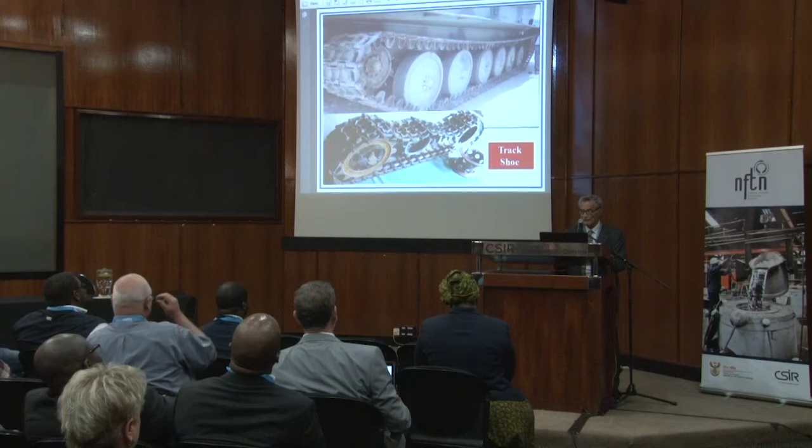Now I give some examples very quickly of spare parts produced in our foundry. The first one: we are the only producers of these track shoes for the tanks of our military forces. This is made from high manganese steel, and this has already been going on for 25 years. The same product can be used for agricultural equipment, for tractors.

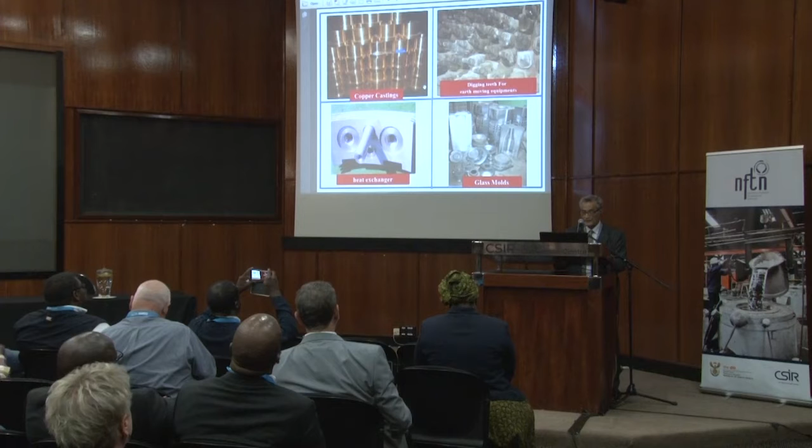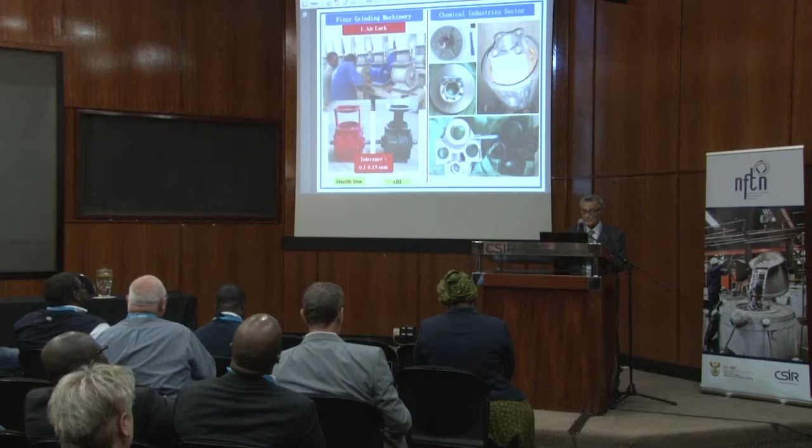We are producing copper castings, digging teeth for our Suez Canal development, heat exchangers, glass molds from a special type of cast iron, different spare parts for the airlock of grain milling machines, which are now used instead of imported ones, and different spare parts for our chemical industry sector, the railway sector, and the metallurgical sector.

In 1949, with the first development of ductile iron, or spheroidal graphite iron, with very small additions of magnesium up to 0.04 or 0.05 percent, the graphite flakes were transformed into spheroidal graphite. This neutralized the detrimental effect of the graphite flakes. We developed this technology because addition of magnesium is not very easy; it is a very pyrophoric process and sometimes gives explosions and dangerous effects.

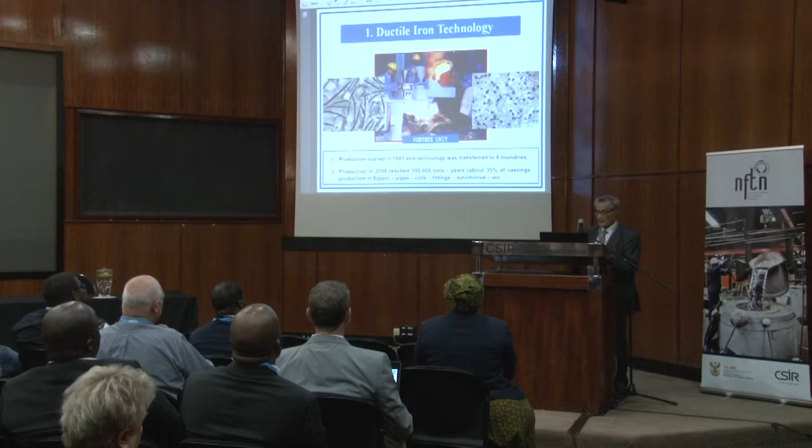We developed a very safe technology, which we call the vortex process, where we pour the molten metal into this tundish, and the metal goes into this compartment tangentially. It rotates in a vortex, and then we add the magnesium alloy through this hopper in the middle of the vortex. The reaction is then very mild, as you can see people standing beside it with no danger at all.

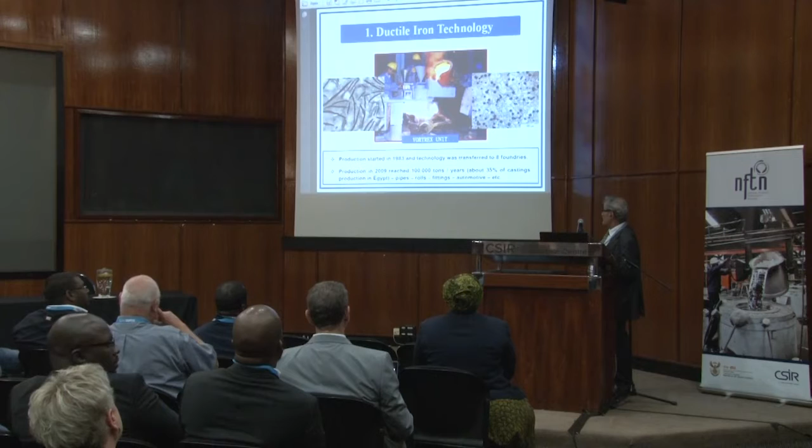We have introduced this technology into 8 Egyptian foundries, and in 2009 we were producing 100,000 tons per year of ductile iron using this technology, representing about 35% of the casting production in Egypt, used for pipes, rolls, fittings, automotive parts, and so on.

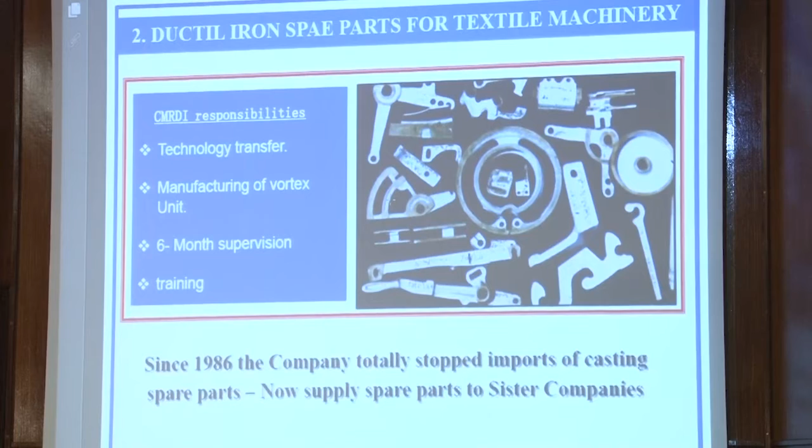Then we moved to the textile spare parts. At the time, we had one of our textile integrated companies employing about 35,000 laborers. It was one of the largest in the world, and they had some problems with spare parts. Spare parts of the textile machinery are rather thin, 2-3 millimeters, so it is not very easy to cast.

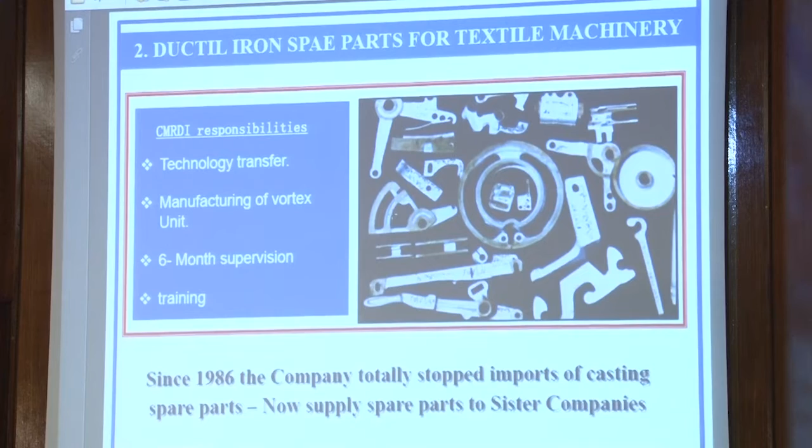The decision was taken to replace the malleable iron castings with ductile iron castings in 1986. Our institute was in charge of technology transfer, manufacturing of the vortex unit in our institute, 6 months of supervision of production, and then training. Since 1986-87, this company has totally stopped importing casting spare parts. Now they are even producing spare parts for other textile sister companies.

Now we move to one of the biggest challenges: ductile iron rolls. Without having local technology for ductile iron roll manufacturing, any country is in danger, really. This happened in some African countries, like I remember Nigeria and Algeria, where the steel industry stopped completely because of the lack of local technology and lack of hard currency required to import these very economically and strategically important castings.

In Egypt now we are reaching 10 to 12 million tons per year, and they need about 7,000 tons of rolls per year. It is a very important product strategically and economically. Thousands of rolls were produced. We have produced about 5,000 rolls until now in different foundries, both single and double poured, as I am going to explain. Several research projects were planned in our institute to increase the competitiveness of these products in both the Egyptian market and the international market, aiming at improving performance or lowering production cost, thus increasing competitiveness.

Now let me quickly show you how we cast. This should have been shown by animation, but I'll explain it. We cast the roll vertically. You need the surface barrel to have high abrasion resistance, meaning high hardness, and then you need high fracture toughness with lower hardness elsewhere. That's why we cast the roll barrel in cast iron chill.

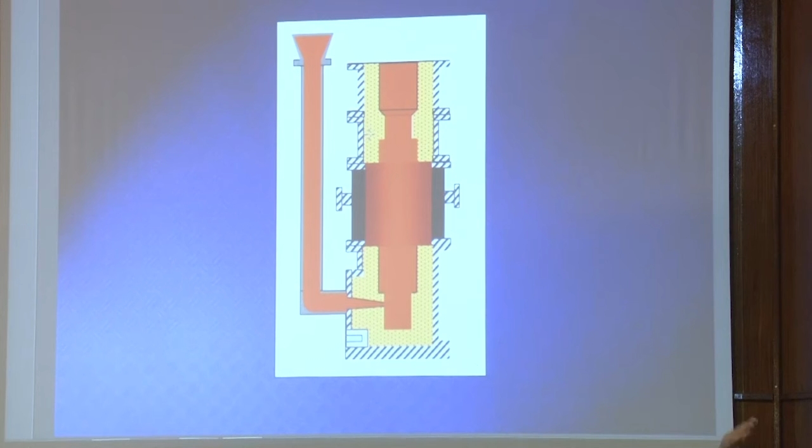This is the black one, a big cast iron mold die, or chill, whose main function is to increase the cooling rate of the iron and promote the formation of carbides at the surface of the barrel. Meanwhile, the two necks, lower and upper, are cast in green sand molds. Lower solidification rate gives lower amounts of carbides and higher fracture toughness.

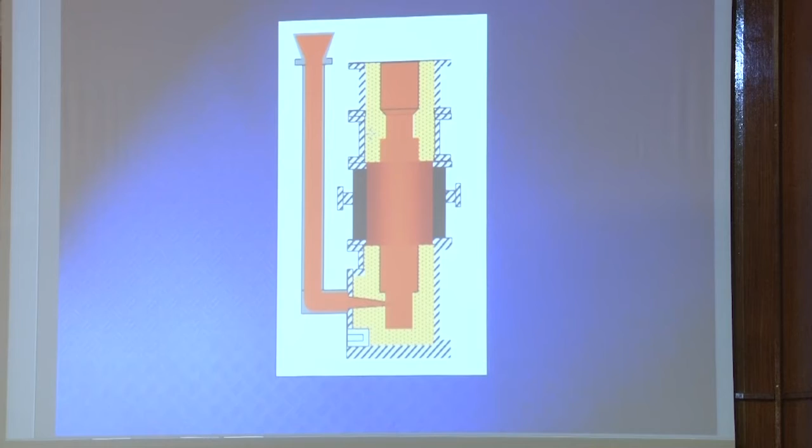We pour the metal from the top and it fills the mold. This is possible, but if you need high hardness at the roll surface, you have to increase the carbon content to form carbides, and add some chromium and nickel - chromium to form chromium carbides with the carbon, and nickel to enhance the formation of martensite at the surface for higher hardness. If you increase carbon, chromium, and nickel, the barrel will be fine, but you will also increase the hardness of the necks.

And then there's a danger that the necks will be broken during operation, which may lead to catastrophic accidents. So we started working with not a single pour, where we pour only one metal into the mold. In the double pour, we use a different technology. We have the same setup, but we overflow before the top, in the middle of the top neck.

We first cast a very hard material, high in chromium, nickel, and manganese, filling the mold. We leave it for 3.5 to 4 minutes, enough to form a solidified shell, while the rest of the metal is still liquid. After this, we pour another tough material into the same system. This should have been shown by animation, but I'm sorry for that.

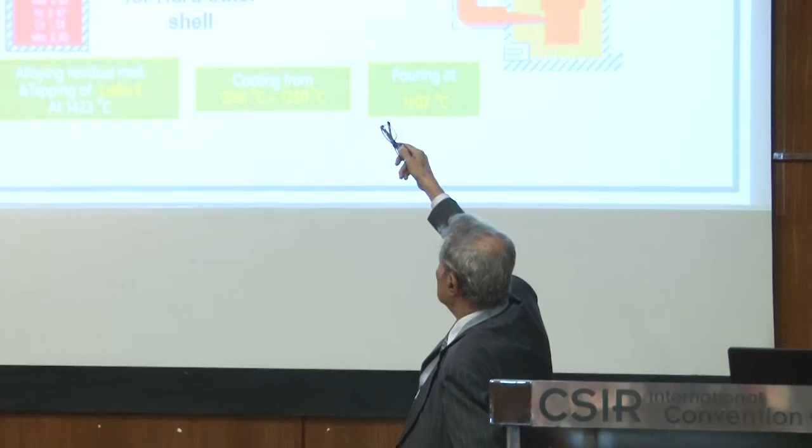chromium 0.3%, for example, nickel 1.4%, and so on. This is the low alloyed iron, which is supposed to form the core of the roll. And we kept it away for a while.

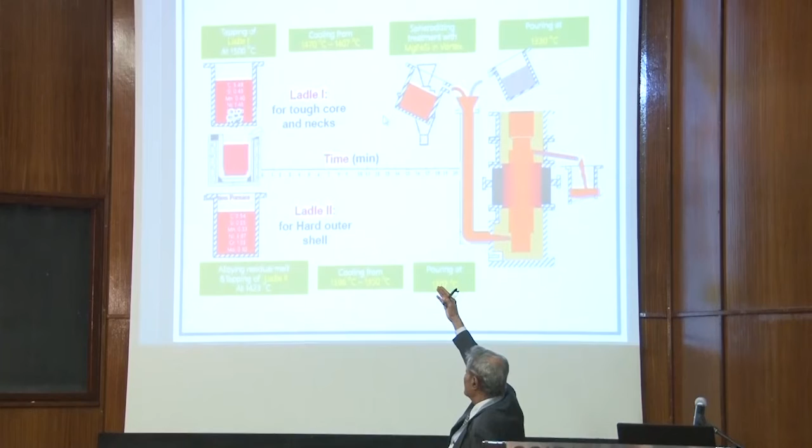Then we added the rest of the alloying elements in the furnace, with chromium up to 1.3% and nickel up to about 4%. This is the high alloy, supposed to represent the outer shell of the roll.

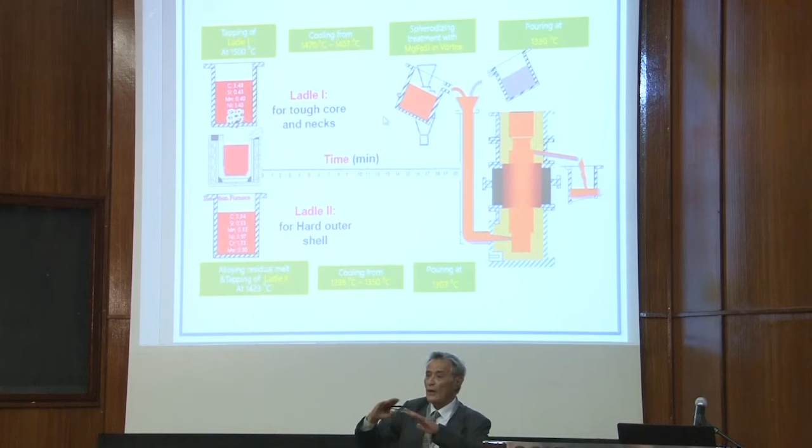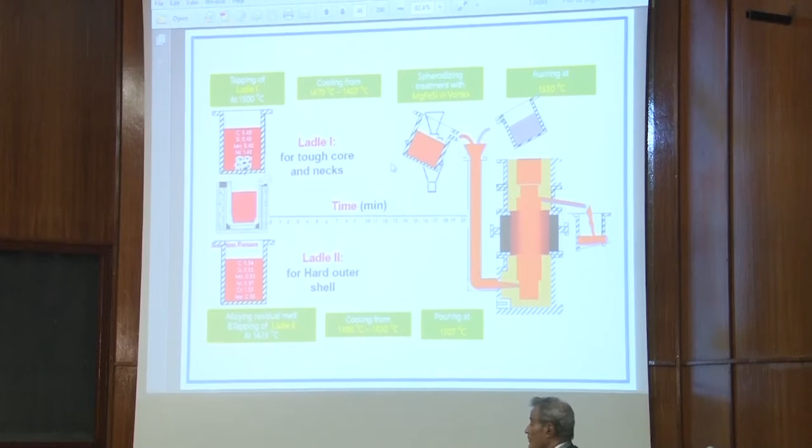Then we took the hard metal, cooled it to 1307, and poured it into the mold, leaving it for 3-4 minutes to form the outer shell, the fired shell.

At the same time, we took the low alloyed iron, treated it with the vortex process to form spheroidal graphite ductile iron, and poured it to form the second layer, or the core, of the roll.

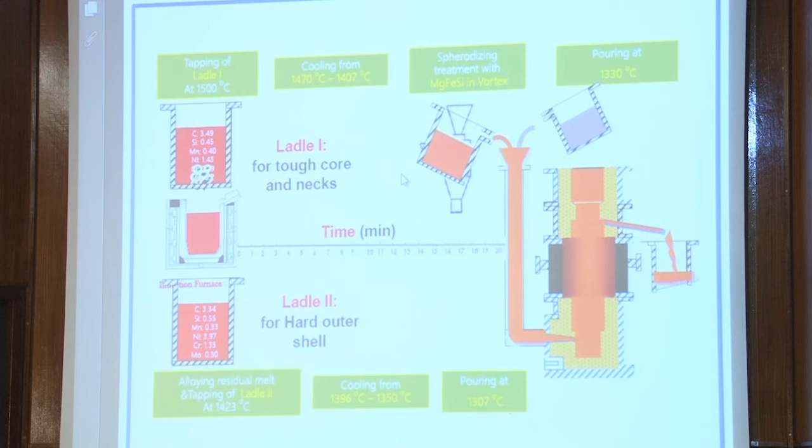It should have been explained by animation, but unfortunately it doesn't work here. Of course, if you have any questions or any interest in this technology, we can discuss it after the lecture.

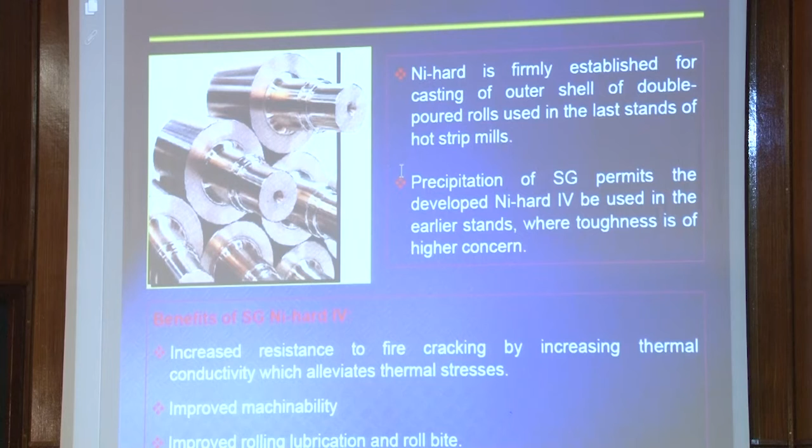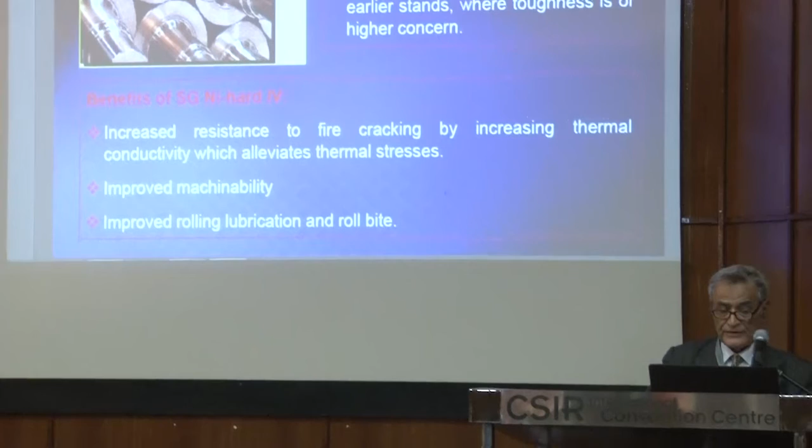Now the alloy, the hard nickel alloy, we call it Ni-hard, is firmly established for casting the outer shell of double poured rolls used in the last stands of hot strip mills. The precipitation of spheroidal graphite permits the developed Ni-hard IV to be used in the early stands where toughness is of higher concern, and the benefits of spheroidal graphite are increased resistance to fire cracking, improved machinability, improved rolling lubrication, and roll bite.

We have so many different types of rolls, about 50 or 60 different rolls, but mainly they can be categorized into two groups: definite chill, or clear chill, rolls and indefinite chill rolls.

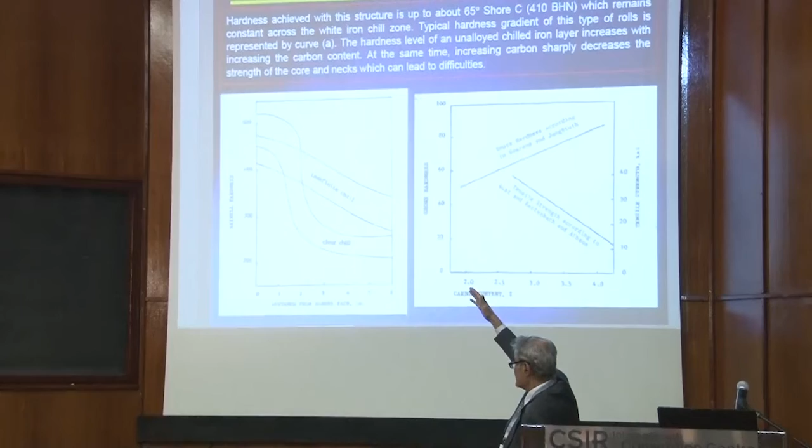This is the hardness gradient of the clear chill, where this is the distance from the surface of the barrel, and this is the hardness. You have a layer of clear increase in hardness at the clear chill, then you have a sudden drop in hardness until the center of the roll.

In the other, indefinite chill, you have a gradual decrease in hardness between the roll surface and the roll center. Of course, I'm not going to go through this, but these are different research projects we have conducted at different foundries.

We started, of course, with the introduction of ductile iron vortex technology in these foundries. Then we were able to produce the rolls. Then we tried to increase competitiveness in international markets, either by lowering production cost or by performance improvement. Performance improvement by development of the double poured rolls or the development of Ni-hard SG iron.

Production cost was decreased by use of sponge iron, the DRI, as a replacement for Sorelmetal, a very expensive material. There was a shortage in our country at that time, and we had to find other alternatives.

And then we improved, we studied machinability of the hard outer shell, because it's a very hard material to machine. Finally, we have Egyptian rolls used in all Egyptian steel mills, and two of our foundries started to export rolls to Arab and European steel mills. These are the details of the technology of roll and different types of roll with different structures.

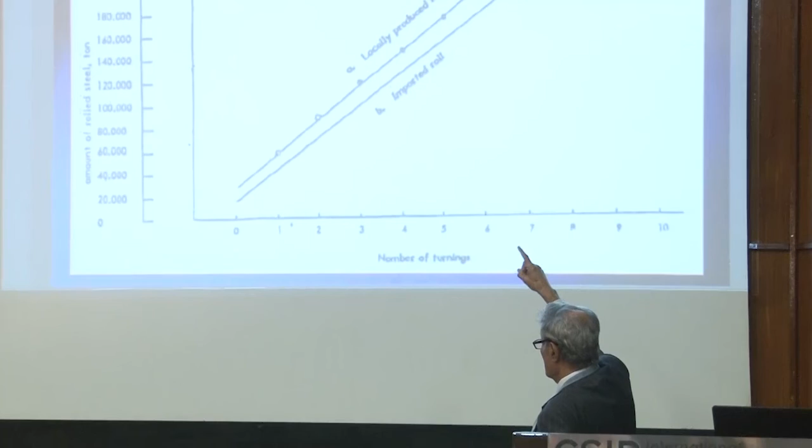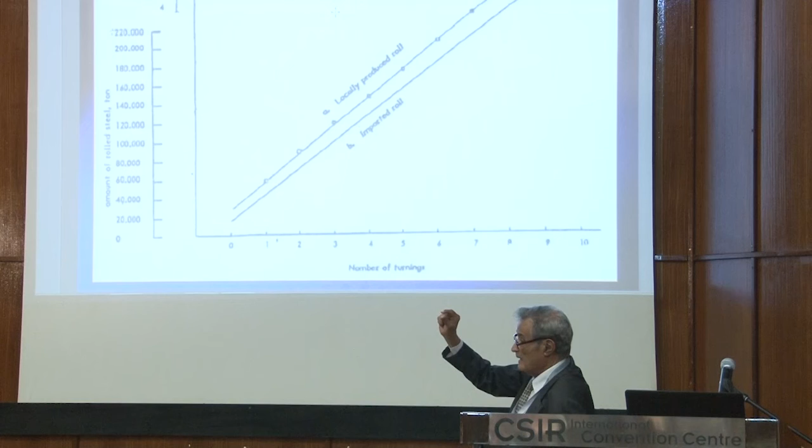Each time you plot - the first turning took place after covering 40,000 tons of steel, and so on - then you draw this curve. Each time you count how many millimeters you had to turn to bring the roll back to its original condition, then divide that by how many millimeters per 1,000 tons. This is the real measure of evaluation of the roll.

This is a curve comparing our locally produced rolls for a Japanese steel mill in Alexandria with Japanese imported rolls. This curve was plotted by the Japanese experts at that plant, and it showed that our rolls were slightly better than the imported ones.

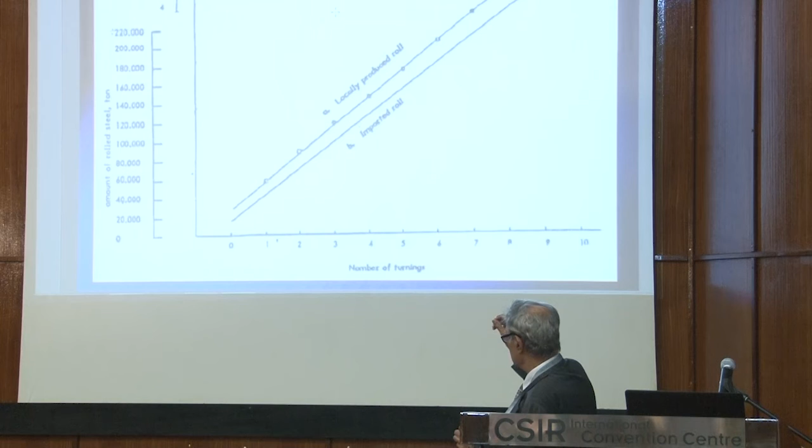Since we started with this company, the company used to purchase 50% of their needs by direct order from this foundry.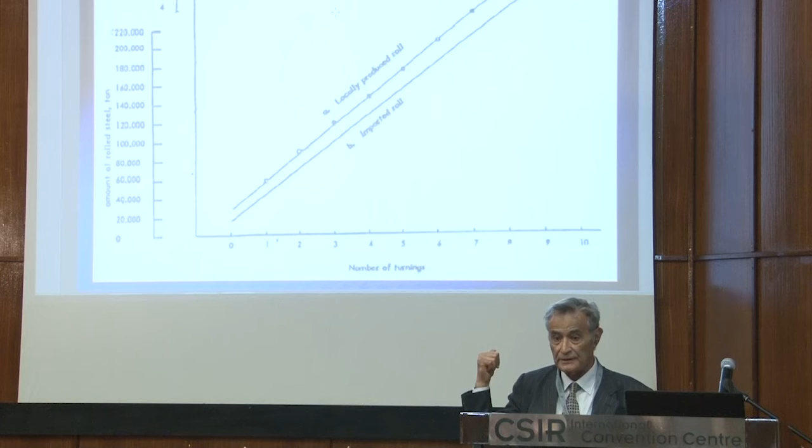Sorry, what about time? I usually forget about time when I start to go. Another 5 minutes? Okay, 5 minutes - this was another case study of technology transfer.

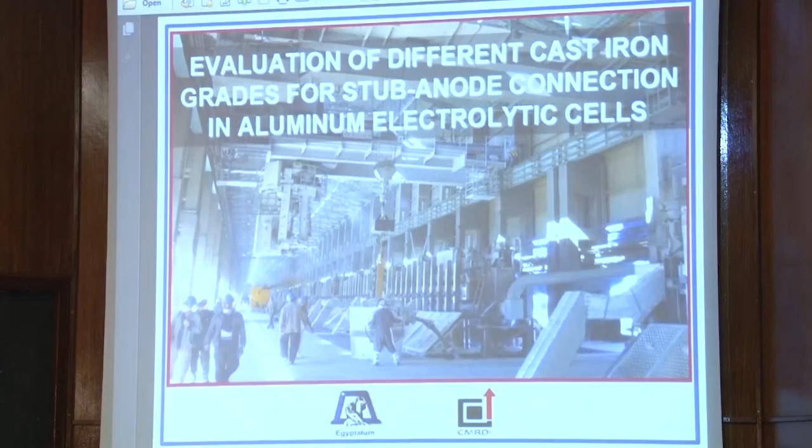This is another case study - we have one of the largest aluminium smelters in the region, at least. This is a photo of this huge smelter.

In aluminium electrolysis, you use carbon anodes, and these are fixed by a steel fork. This is the carbon anode, and this is the steel fork which hangs the carbon anode in the electrolytic cell. This hanging takes place through pouring cast iron into the collar between the steel fork, the steel stub, and the carbon anode.

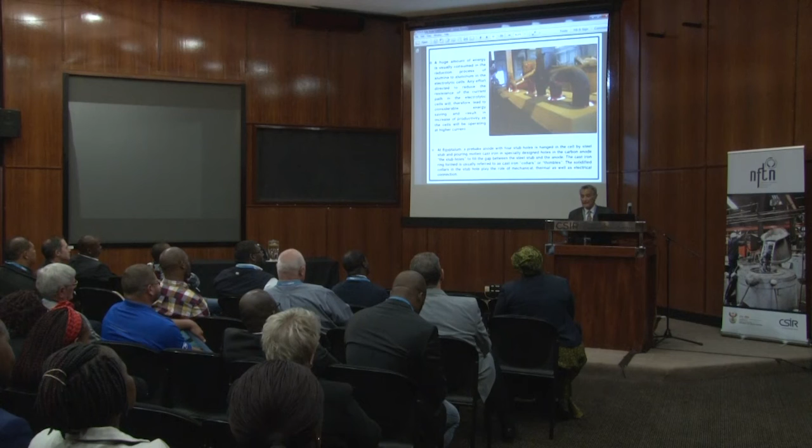Before this, it was believed - working with Russian technology - that if you pour cast iron into this very small gap between two very strong chilling materials, the carbon anode and the steel stub, the metal should have maximum castability or fluidity. Fluidity is enhanced by phosphorus addition, so they used to use cast iron with 1.4-1.5% phosphorus. But this really affects the electrical conductivity of this joint.

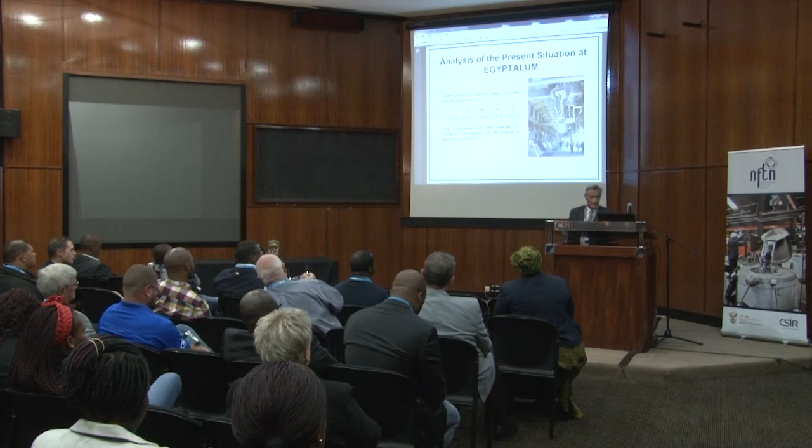The power loss happening across the whole electric cell - 50% of this loss happens at this junction. If you improve the electrical conductivity of this junction between the steel stub, the anode, and the cast iron collar holding them together, you save a lot of power and money. So we started to investigate alternatives to high-phosphorus cast iron, and we found that phosphorus is not the proper alloying element.

Graphite exerts some expansion forces during solidification - it's a very light material that occupies a lot of volume when forming. This formation of graphite increases the contact pressure between the steel and the carbon, and this dramatically improves the electrical conductivity at the junction, saving a lot of money.

The report we have from this big smelter indicates that replacing this collar material, about 2 kilograms, with another cast iron material was enough to save millions of pounds every year.

This is another project, and these are the people who worked with me. I would like to thank them because we spent 1 year working together.